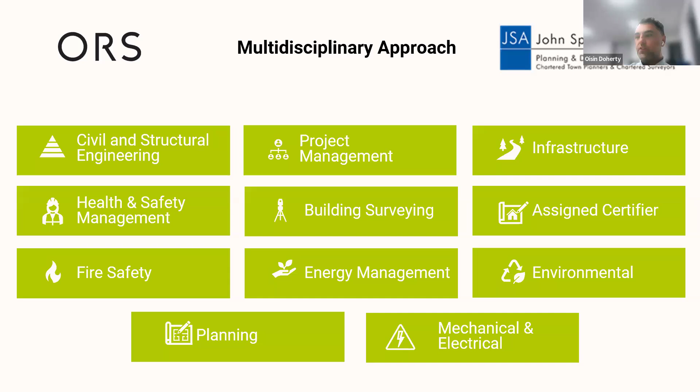So very quickly, just an overview of ORS and John Spain Associates, who we are and what services we provide to the biogas industry, but to development in general. We're very much a multidisciplinary consultancy focused on 11 key areas, providing services to developers through all stages of development, from planning right through to construction and operation. I won't go into too much detail here, but we're happy to share further information with anyone interested following the presentation.

Please do reach out if you want any further information on ORS or John Spain Associates. Looking specifically at biogas and biomethane, some of our specialist services at the planning and design stage are listed here. Over the last number of years we've been heavily involved in the development of renewables projects, including biogas, at different stages. Specifically for biogas developments, we offer feasibility studies, planning services, environmental impact assessments, right through to licensing and permitting. We also provide technical expertise through the environmental team at ORS and license compliance during the operational stage of developments.

So the title of the presentation is Biogas: the Process, Planning and the Future. We'll address the process first of all. Many on the call may be familiar with the AD process in general, but just to give a quick overview of the process, what's involved, and where we're at now in terms of the biogas industry in Ireland.

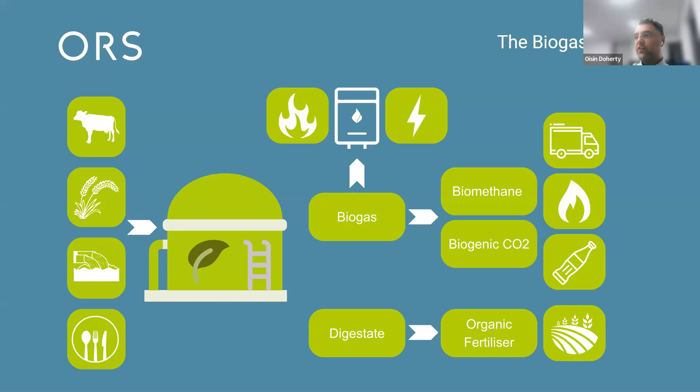As I mentioned, biogas is generally untreated, with biomethane constituting 55 to 60% of the content, the remaining gas content being CO2 and some trace gases. Through the biogas upgrading process, we are left with two gas products: biomethane and biogenic CO2. Biomethane can be a direct replacement for fossil-based natural gas, and biogenic CO2, recovered from the process, has multiple uses in industry.

The final product is digestate, a high nutrient value organic fertilizer which remains after the digestion process. This is an excellent fertilizer and can be used to displace carbon-intensive chemical fertilizers in agriculture.

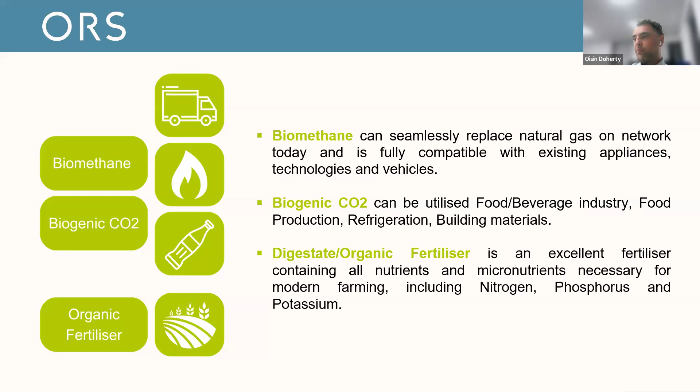The plant itself, so to touch on the scale and output from the types of plants that are being brought forward to planning in Ireland currently, the scale, certainly projects that we've worked on in recent years, is focused on this sort of range, the 40 to 60 gigawatt hour range for biomethane production.

We've seen a focus on agricultural-based feedstocks, so manure slurries, supplemented with some crop feedstocks such as grass silage and maize. In terms of overall feedstock volume, this sort of 60,000 to 90,000 tons per annum annual intake from local sources, generally within 20 to 30 kilometers of the facility.

So this is the output scale that is mentioned and generally supported in the biomethane strategy that was published in 2024, and we'll touch on the strategy further on in the presentation.

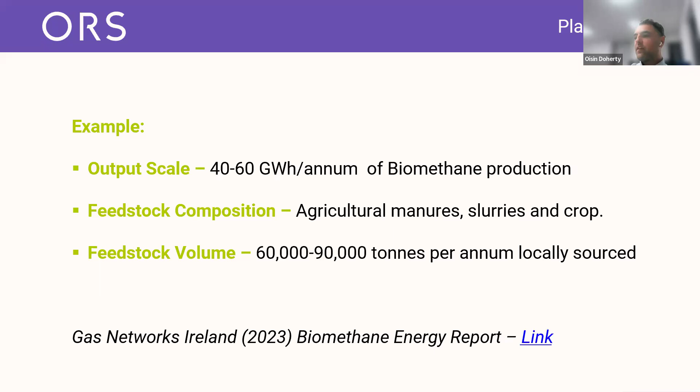At this point, we would like to share an example project that we worked on in recent years as a visual guide to talk our way through some of the key technology and infrastructure involved in a biogas plant design.

As a general overview, this is a project we delivered in 2022 that was successfully through the planning system in 2023.

Standard silage clamp design, as you would expect in an agricultural operation. Here, the client has opted for a roofed structure to maximize the space for solar PV on site.

So this, again, as I say, the feedstock composition with this particular development is very much agricultural based. Some crop-based feedstocks with waste products, waste from agricultural operations such as slurries and manures.

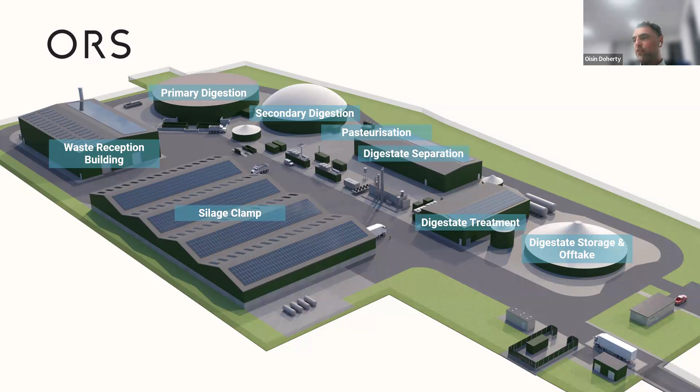Moving to the gas treatment then, biogas upgrading is included here, which in simple terms is a system that separates the biomethane from the CO2 and the trace gases. There's also a CHP plant on site to generate heat and power for the site itself.

So the intention here wouldn't be to export electricity off site, it's to cover the parasitic load of the plant and facilities itself.

And on the biogas upgrading end of things then, your key product, your biomethane, is supplied to the national grid through the biomethane network entry facility located at the front of the site here. This is your grid connection point where your biomethane, once it meets the appropriate standard, is fed forward to the national grid through this facility.

Also included here is CO2 liquefaction, whereby the carbon dioxide is captured, liquefied, and processed so that it can be transported as a product off site as well.

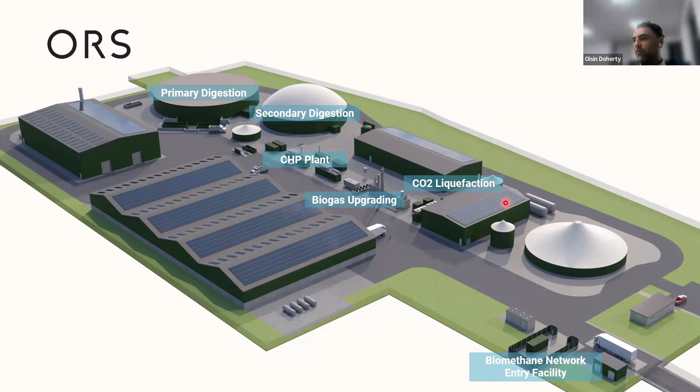Very quickly, just to discuss some of the other elements of the site feed system. Within the feedstock reception building, generally a feed system of this type would be used for solid feedstocks such as manures, fed forward through a series of sealed pipework and mixed along with liquid feedstocks such as slurries to create a homogenized feedstock mix and fed forward to the primary digesters.

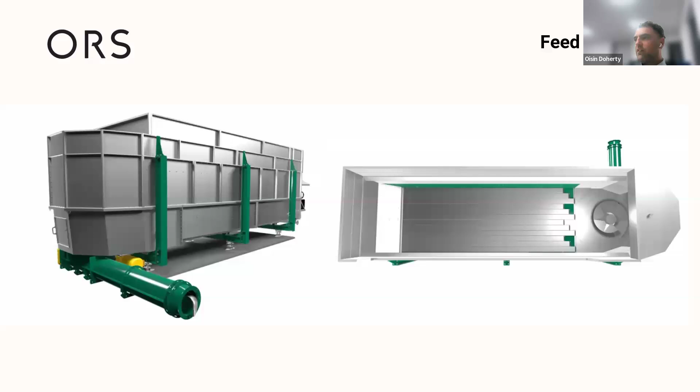Odor abatement is a key part of the appropriate storage of waste products such as manure and organic feedstock. Within the sealed waste reception building, often odor abatement systems are required. This is also a license requirement - if the development meets the criteria for an industrial emissions license, odor abatement would be included as part of the design.

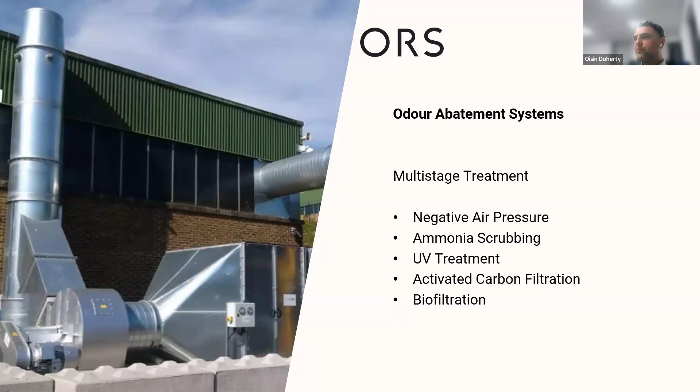There's a list of different options for different types of odor abatement. I mentioned the CHPs there as an example. In some cases, the CHP would be generating electricity for export off-site as well, but generally, our experience of projects to date is that it's generally used to power the site itself using the site's own biogas and biomethane as fuels.

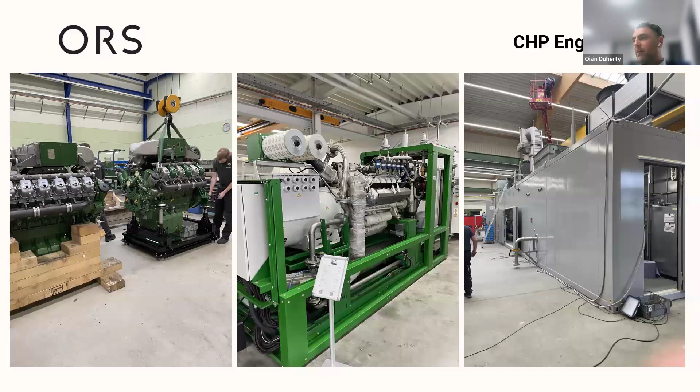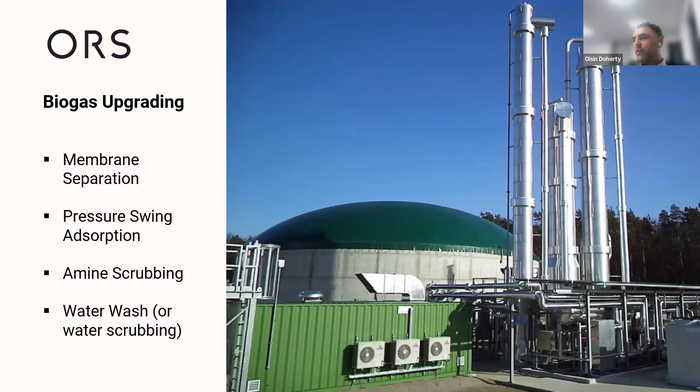The biogas upgrading technology - there are different approaches to upgrading technology. They all work on the same principle in that you're separating the methane from the CO2 content. So there are multiple options in terms of upgrading technologies.

I mentioned the grid injection point. The GNI have produced a standard design for their biomethane network entry facility that's visualized here, and this infrastructure is included within the design of the plant itself. The technology within this tests and guarantees the quality of the gas before it is transported onto the national grid.

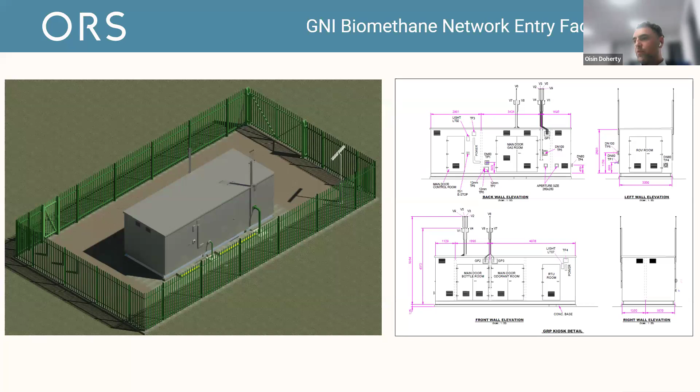So Digestate, again, a product of the process. It can be used as a direct replacement for chemical fertilizers. The benefit of Digestate is that there's a huge reduction in the carbon intensity of this form of fertilizer versus the production of chemical fertilizers. So there are huge benefits to that.

The benefit of Digestate as well, in the case of an EPA licensed facility, is that the Digestate undergoes rigorous testing on a monthly and quarterly basis for nutrient value, as well as pathogens and metals content. When this information is shared with end users - the farming community - this allows farmers to apply the Digestate in accordance with their nutrient management plans, because they know exactly the nutrient value within it, whereas this information may not be available for untreated slurries.

Options then for Digestate treatment: I mentioned pasteurization. Separation is a simple first stage in terms of Digestate treatment, removing the liquid fraction from the fiber fraction of the Digestate. What you're left with is Digestate fiber, visualized here, very much like a compost type product, with the remaining liquid fraction - liquid Digestate. This liquid Digestate can be dewatered and processed further into higher concentrate Digestate liquid. There are also further options such as drying, pelletization, and nutrient recovery.

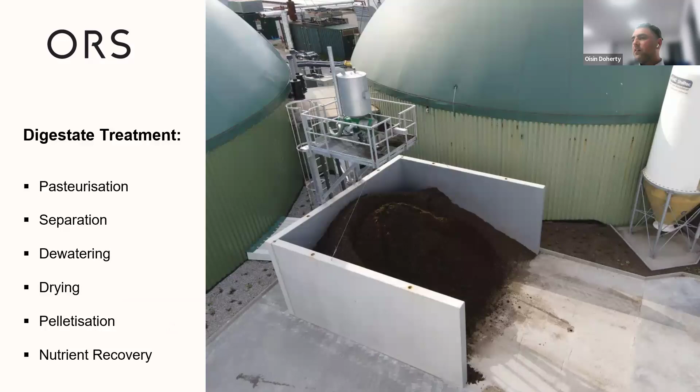The benefits of Digestate use sit within the context of the cost of chemical fertilizers, both the financial cost and the environmental cost. We've seen in recent years the cost of chemical fertilizers going through the roof. So there are economic benefits for the farming community, as well as environmental benefits, to the use of Digestate.

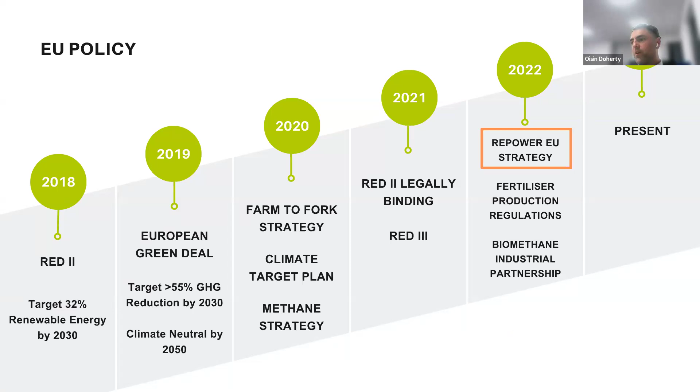There's been a lot of talk about biogas and biomethane specifically in Ireland in recent years, so just to touch briefly on the policy drivers behind that. I'll highlight the REPowerEU strategy from 2022, which was a result of an EU-level push towards energy independence from Russian gas supplies - a push to grow the biomethane sector across Europe and move away from reliance on Russian gas.

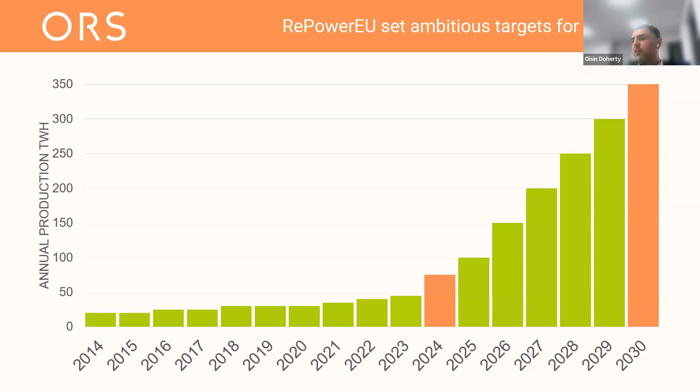This would equate to 10% of the total gas use currently in Ireland if the 5.7 terawatt hour target is achieved. I suppose this highlights the role for biomethane within the overall energy mix in Ireland. Currently, 46% of our electricity generation in Ireland is powered by natural gas fueled power stations, and biomethane is obviously a direct carbon neutral replacement for that natural gas. So we're still very heavily reliant on gas as a fuel to create electricity here in Ireland.

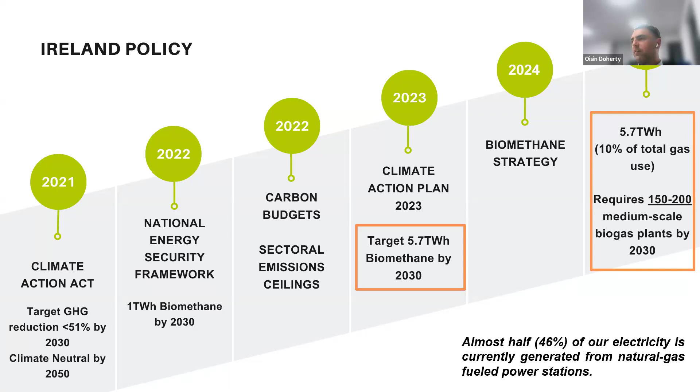So, 150 to 200 facilities need to be built and in operation by 2030 to achieve that 5.7 terawatt hours. Here we are in 2025 - it's a short time frame, and there's a lot of work to be done to achieve those targets.

Why has there been so much talk in Ireland about biomethane development, and where are we now in the biomethane industry in Ireland, and where could we be by 2030? So the current status where we are now: 40 operational biogas facilities in the Republic currently, including AD attached to wastewater treatment plants. So the majority, as previously mentioned, are biogas to CHP.

There are currently 2 operational facilities that are supplying and injecting biomethane to the grid. So currently that biomethane supply only meets 0.0001% of the gas usage in Ireland. So there's a significant amount of development needed if targets are to be achieved.

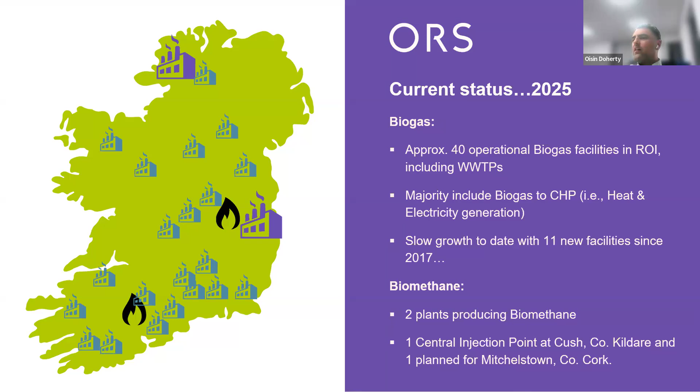And the background, I suppose, to Ireland's potential, which has been widely talked about: the EC has identified Ireland as having the highest potential for biomethane production per capita of any country in Europe. So why is that? It's because of our healthy agricultural sector. We're all well aware of our reliance on the agricultural sector here in Ireland, and just to go into a bit more detail where we sit in terms of the EU and biogas potential.

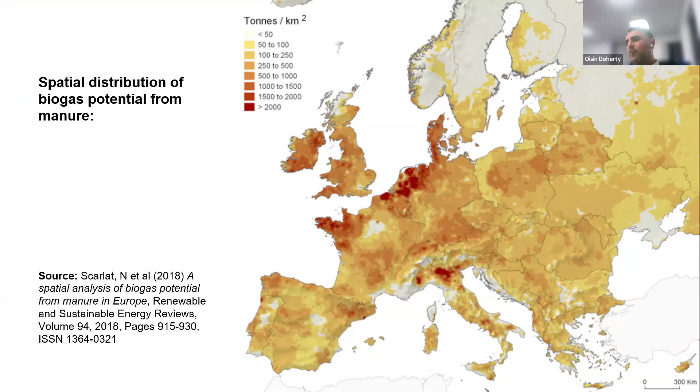So the study looked at the potential resources of manure for AD feedstock supply across Europe, and you can see we rate quite heavily there on the scale. In addition to this, our climate and our herd numbers and the current slurry supply available lend itself to significant feedstock supply for AD systems. So you can see here both slurry and silage.

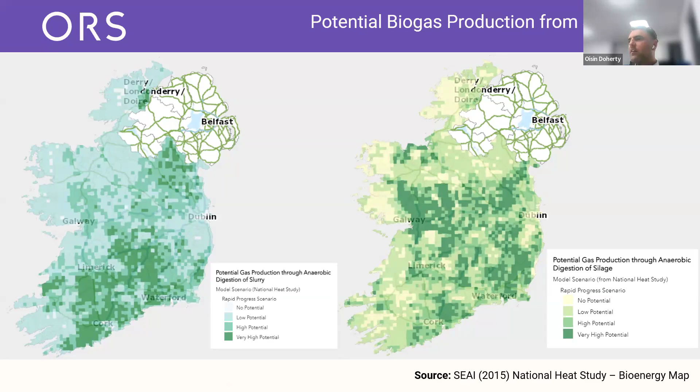There are areas highlighted here that have significant potential supply of feedstock for AD, particularly in Munster, South Leinster, North Leinster, and then pockets in Galway and East Donegal as well for slurry, and a similar picture when it comes to the availability of silage as a feedstock for AD. Again, just to summarize, the CH4 production is sufficient to displace 15% of current commercial and industrial natural gas consumption.

So in terms of the deployment model, some sites will opt for direct grid connection to supply biomethane to the grid directly, but there's also the option of a virtual pipeline, where the biomethane would be compressed on site and transported by a specialist tanker to centralized grid injection points or CHP sites.

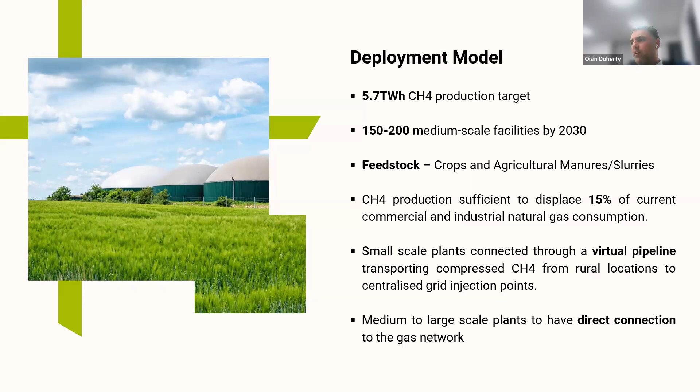So here we are in 2025, so we're only 5 years out from the 2030 targets, and that's just showing where we need to go over the next 5 years. Significant amount of development needed.

Much of our work within renewables and biogas development, site selection is key when bringing a proposal forward for planning. So just to touch on some of the key considerations when assessing a potential site. So feedstock availability and proximity to the development. A key consideration is the availability of feedstock supply generally within a 20 to 30 kilometre radius of the site. And equally important is the availability of a suitable land bank for the spreading of digestate.

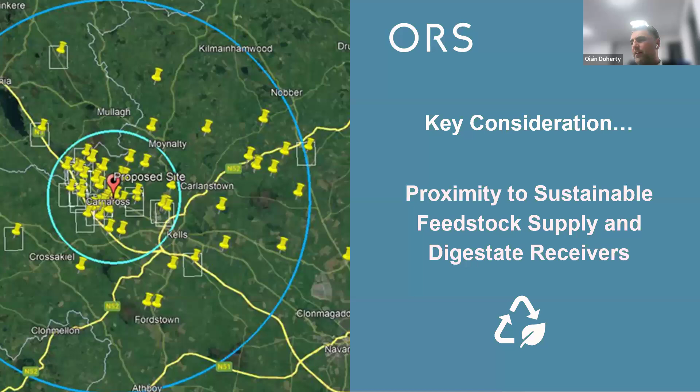So in this cooperative model, you would have a number of farmers supplying sustainably sourced feedstock to an AD facility and then receiving digestate in return, creating a local circular bioeconomy. An important consideration as well is the proximity to the gas grid, be that for a direct grid connection, or, as I mentioned, virtual pipeline is also an option if not in immediate proximity to the grid, but within a sensible distance from a centralized grid injection point.

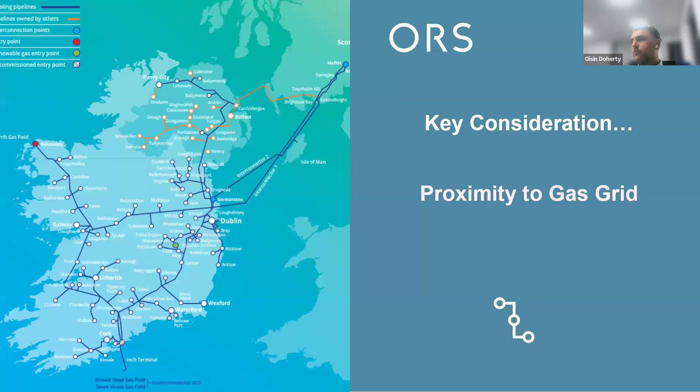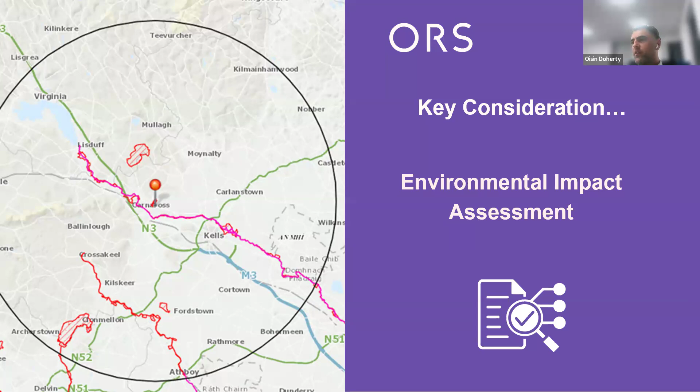And as with projects of this size and scale, given their inputs and outputs, environmental impact is a key consideration when bringing a project forward for planning as well. So some of the key considerations I'll touch on, but the classification of project: if a project is processing greater than 25,000 tonnes per annum of waste products, it will meet the threshold for environmental impact assessment.

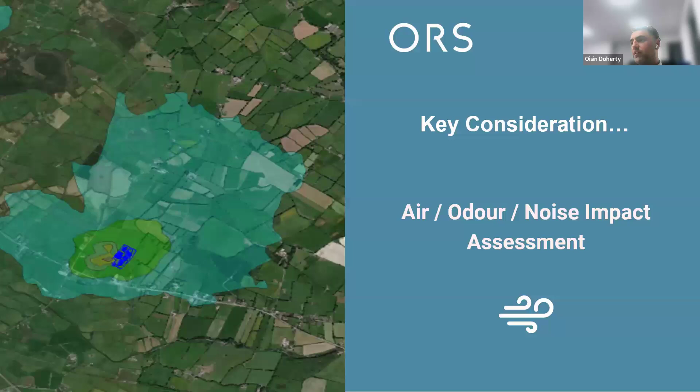Between myself and Luke, I don't know how many public consultations we've sat through in the last number of years on projects of this type, but over and over, the key concerns are air emissions, odor emissions, and noise emissions. So it's important to support any application with detailed analysis on all of those considerations. As with traffic, which is another key consideration. So traffic and transport assessments are key to assess the volume and impact of traffic movements to and from the facilities.

So following the planning stage, assuming a positive outcome at planning, the next step is licensing. So two important considerations, the statutory bodies here, the Department of Agriculture and the EPA. So dealing with DAFM first, the Department of Agriculture, Food and the Marine.

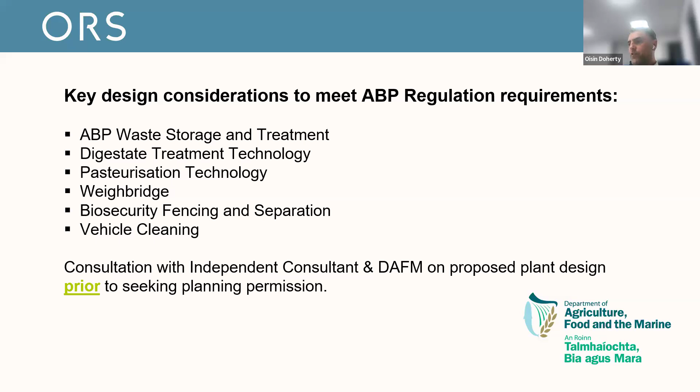So it is a three-stage approval process really with the department. The first stage being the application AP11, which details the design and how the processes within the plant meet the requirements. Once approval in principle is received, then it moves to the second stage application, which goes into more detail in terms of operational procedures on the site, your HACCP plan, and your validation plan. So within that, you'll outline your procedures in terms of testing of your digestate for E. coli and Salmonella and other potential pathogens, and your plant validation plan.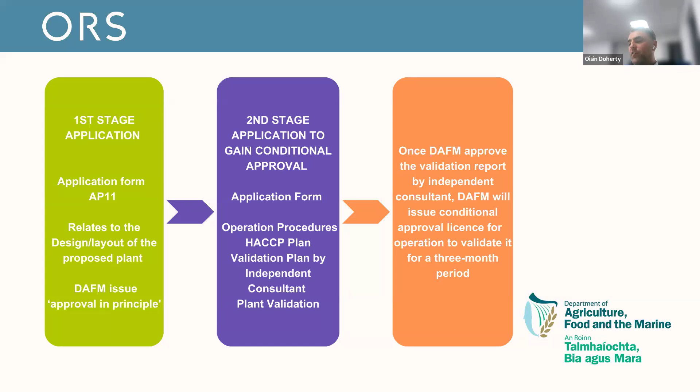And in terms of waste licensing then too, the key considerations here are, firstly, it may be subject to a waste facility permit with a local authority if it's dealing with up to 10,000 tonnes per annum of organic waste. And the other consideration is a waste license with the EPA if above 10,000 tonnes per annum of organic waste. And then once you go beyond 36,500 tonnes per year, generally you're into the realms of industrial emissions licensing with the EPA at that stage.

And in terms of EPA licensing, important considerations at design stage are the inclusion of BAT, best available technology, throughout. So that looks at your odor abatement treatment, your bunding, and your other measures throughout the site to ensure that any potential emissions are mitigated, managed, and monitored.

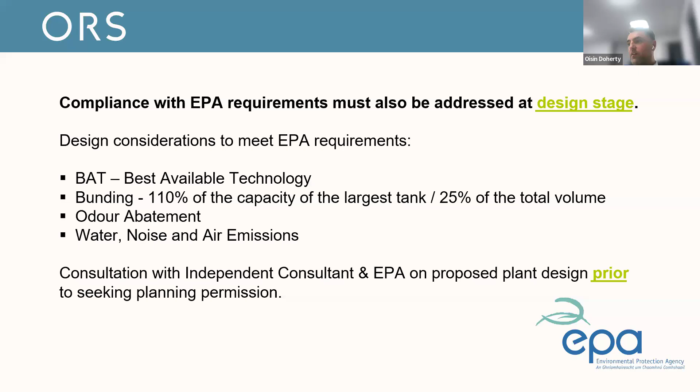So I think that's enough for me for now. I might hand you over to Luke to deal with some of the planning policy and guidance. Thanks very much, Oisin, for that.

So we'll really just give you a quick whistle-stop tour, and it's really a snapshot of where we're at the moment in terms of planning policy, and some of the processes around getting these plants through the planning system. So we can move on maybe to the first slide there. So starting out at the highest level from a planning policy point of view, obviously the National Planning Framework published in 2018. There's very strong policy support in there for renewables development.

The current version of the National Planning Framework doesn't really get into biomethane in too much detail, but many people will probably be aware there's an ongoing process to replace the 2018 document, draft published last year, I think in the late spring, consulted on in the summer, and some updates published in November. So we're eagerly awaiting that. But in summary, that does have a much stronger policy support directly for biomethane, and it follows on from the biomethane strategy that was published by the government last year as well. So we'll touch on that in a bit more detail.

The next level down from that, then, you have your regional spatial and economic strategies published by each regional assembly. Again, there's good support for renewables broadly in those, for circular economy, and limited enough reference to biomethane, but something that we'll probably see feed through a bit more strongly following the update to the NPF. Where we see the most variation, which is typical in terms of each county's plan being different, is at the county plan or city plan level. Not that we're proposing to build these in any cities for the time being anyway. But there's a high degree of variability there.

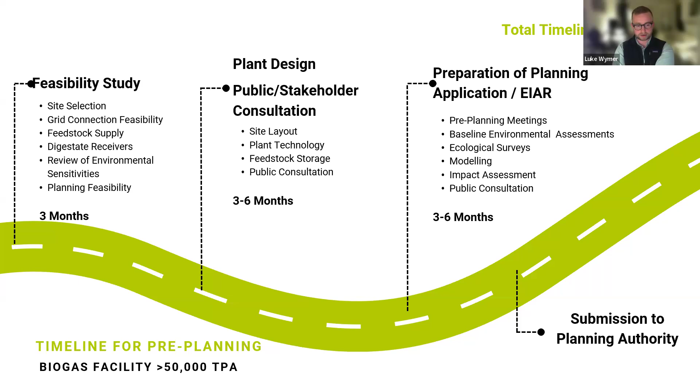So then at that point, you're ready to submit a planning application to the local authority, and that's a 2 month process that we'd all be familiar with. The first 5 weeks of that being public consultation, where people can make submissions. Most of the applications for biomethane plants are subject to further information requests, partially just due to their scale.

But equally, I'd say, because most applications being made at the moment are probably the first or maybe the second such application to be made in recent times for this type of development in any given county. So there's a fairly steep learning curve that we would have been through in terms of getting to grips with them and preparing a robust application, but the planning authorities are also having to go through it themselves. So we've given ourselves 1 or 2 months there to respond to an FI request, which isn't too bad.

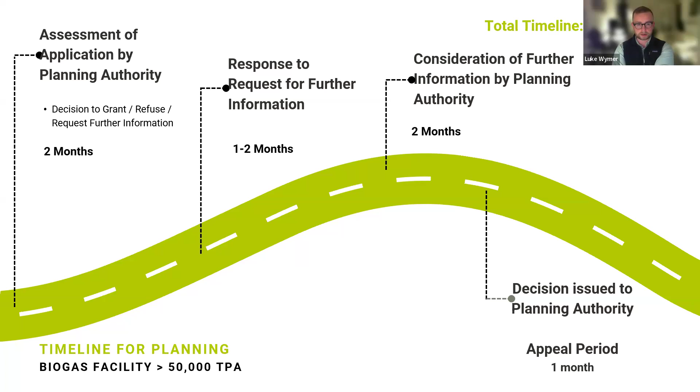Assuming there's an EIAR, which most large scale projects will have, there's a 2-month window for the planning authority to make a decision on a Natura impact statement, followed by a 1-month appeal period. Anyone who made a submission, or even NGOs who didn't, can appeal the planning authority's decision to the board, as can the developer if unhappy with any aspect. So it's a moving target in terms of the board's timelines for deciding appeals.

It had gotten to a point where appeals were taking over a year, and that's still true for many cases at the moment. But we'd estimate cases going to appeal now or in the next few months will come down to more of a 6 to 8 month timeline, or even less. The backlog has been significantly eroded over the last year or so.

After the appeal process, a final planning decision is made, and there's an 8-week window where the developer or third parties with sufficient interest could seek a judicial review of the decision. There's been a couple of JRs on biomethane plants, a couple of overturns of grants of permission, but overall not a particularly high incidence so far, and we'd be hopeful it stays on the lower end. There's been an increased prevalence of JRs over the last 4 or 5 years, so it'll be interesting to see how that pattern plays out for this type of development.

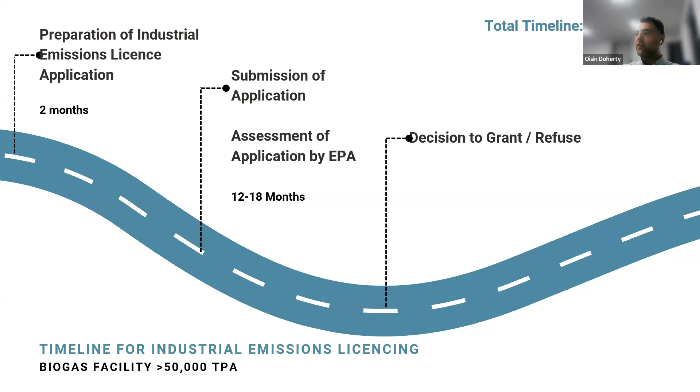And all that's before you're even into your construction timeline—then you have to build the thing.

That's a pretty worrying metric. We're hopeful timelines will come down, but they really need to if we're going to have any chance of meeting that ambitious target. There's been similar analysis done by the likes of Wind Energy Ireland looking at the issue with wind farms and the permitting process, and how that stacks up against a 2030 deadline to avoid significant fines. So there is a challenge there for sure.